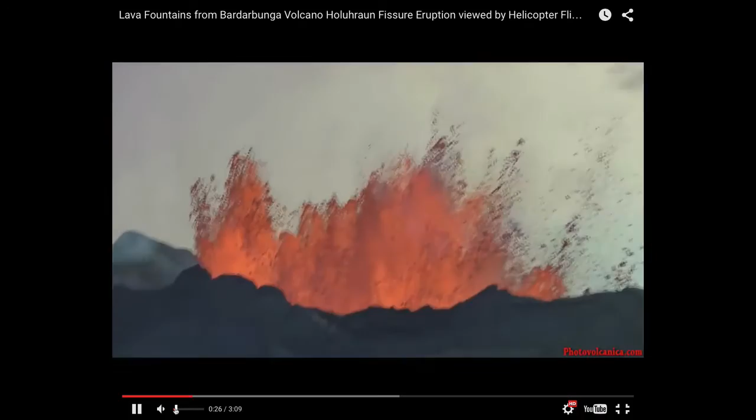Bardarbunga volcano. Sounds like a Silvio Berlusconi joke, doesn't it? Bunga Bunga. And this is a volcano that was erupting in the summer. It didn't turn out to be as devastating as the other one that's impossible to pronounce, the eruption that was erupting maybe underneath a glacier in 2011, I think, and shut down all of the airspace to Europe.

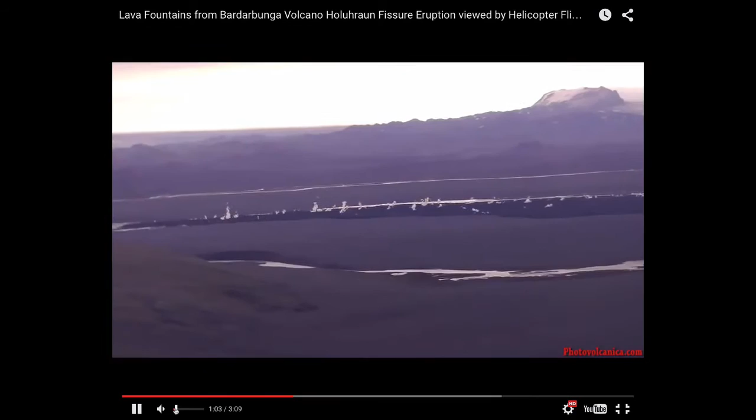Most of the routes from the east coast and the west coast of the U.S. to Western Europe take a great circle route, which goes quite close to Iceland. The shortest distance between 2 points on a sphere is a great circle, and that great circle passes pretty close to Iceland. And so this never turned into the huge ash discharge that was the problem with

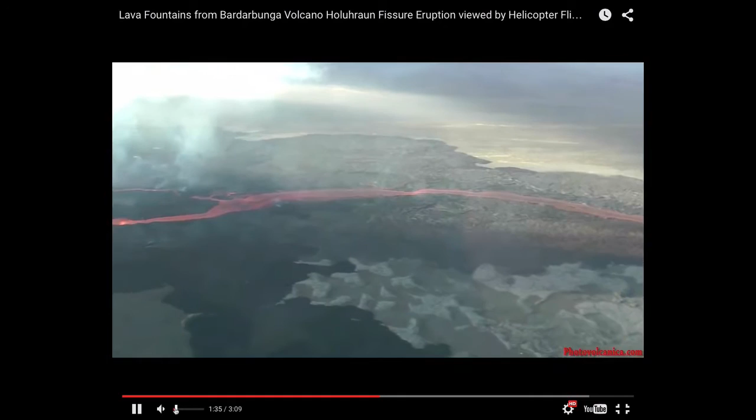Eyjafjallajökull, which I think over maybe 1 or 2 or 3 weeks shut down airspace between Europe and the US, primarily because you don't want to be flying into an ash cloud because it's not very good for the engines - it strips the engines. I think it doesn't do much more than that, but the question is how much ash is too much ash. And there certainly has been one.

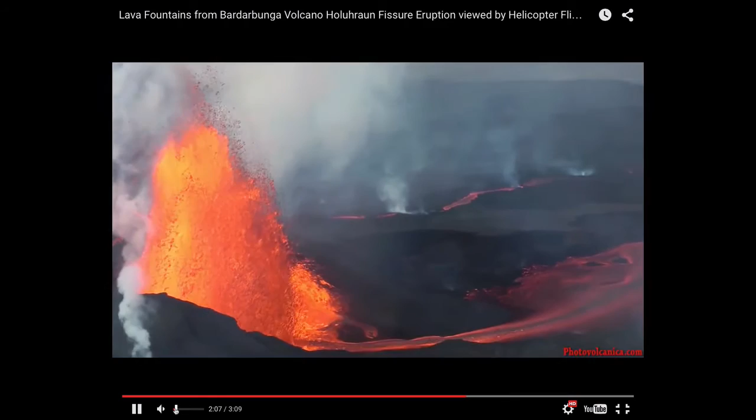There's a KLM 747 that was flying to Anchorage and went through a dust cloud, I think maybe from Redoubt, and all of a sudden the cockpit goes dark, all 4 engines flame out, and that's not really where you want to be in a plane, where you can only hear the wind around you. They ultimately did get them restarted and landed safely, but a hazard nonetheless.

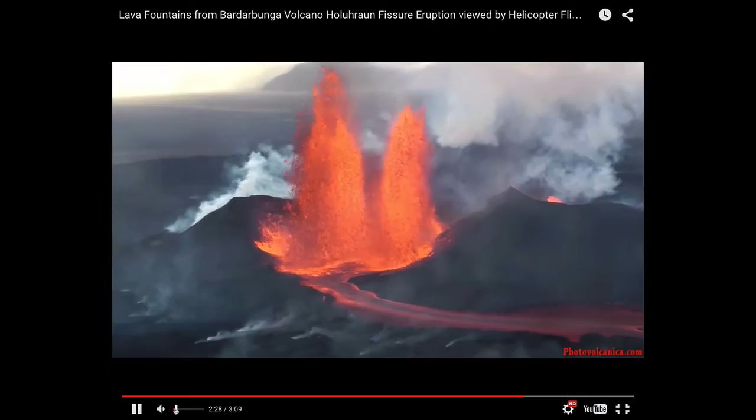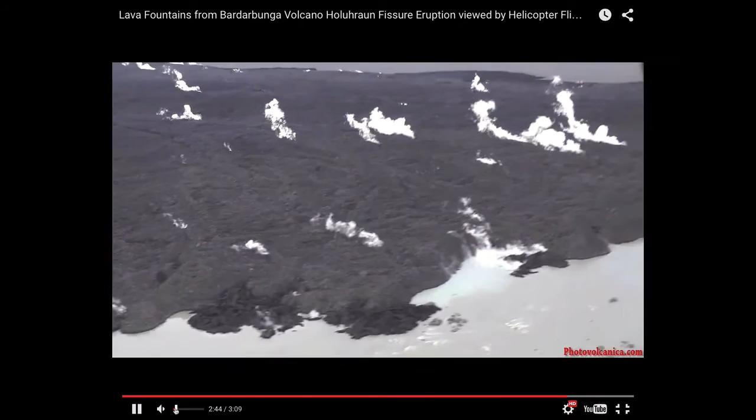Also, if you go to Asia, all the Pacific routes go down, you go over the pole. If you go to Beijing or Tokyo, you go over the pole and then come down across the Kamchatka Peninsula, which is volcanic. So the Ring of Fire, you basically travel the Ring of Fire by plane. One of the hazards is knowing when these volcanoes erupt, and as a result of that eruption, create this hazard for aviation.

So anyway, all by way of saying, when we're talking about fluid dynamics, we now have enough information to be able to do something about that. So we can look at the mechanisms by which eruptions occur. We can do a very simple calculation, and the simple calculation I was just going to do, just for the hell of it, was to...

So one question would be, where are we? We're 5. Still talking about fluid dynamics, still talking about Bernoulli.

So you have this system that looks something like this, where you have a volcano sitting on top of the crust. The crust may be something like 30 kilometers thick. So the question is, or one question could be, what velocity?

We can use Bernoulli simply to do that, so long as we constrain it. We do exactly what we've done in the past, and that is that we write Bernoulli at 2 points. We write out the 6 terms. We take this tack of always writing from upstream to downstream, as a matter of course. We don't need to do it yet, but we will do in the future.

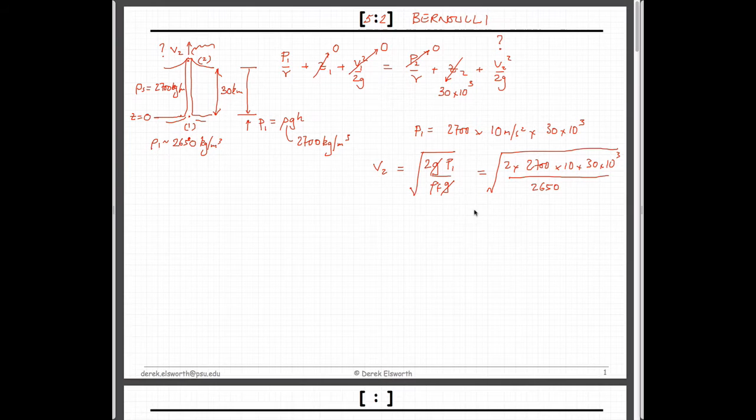And I suppose I could do that calculation. Did I do that calculation? I did that calculation if this is equal to 2600, and if that's the case, then V2 actually comes out to be 144 meters a second, which is preposterous, of course — about 300 miles an hour. And it's conditioned by the difference. So if you take this number as 2600, that's what you end up getting for V2, and that's much too fast. But it's conditioned by the magnitude you choose for this.

But the bottom line is that if you know or estimate the magnitudes of the pressure here, and if you know the density of the fluid that's driving it, given the mechanism that makes it work — the mechanism being that you have a weight from the supernatant crust sitting on top of this, and you have a fluid which is buoyant relative to that, rising up through it. Instead of calculating it as a buoyant force, Bernoulli accounts for that in some way because it's really balancing forces. It accounts for the fact that this magnitude is less than the column. In other words, you have a larger pressure here than the pressure here, and therefore this stuff gets forced out, squeezed out like toothpaste.

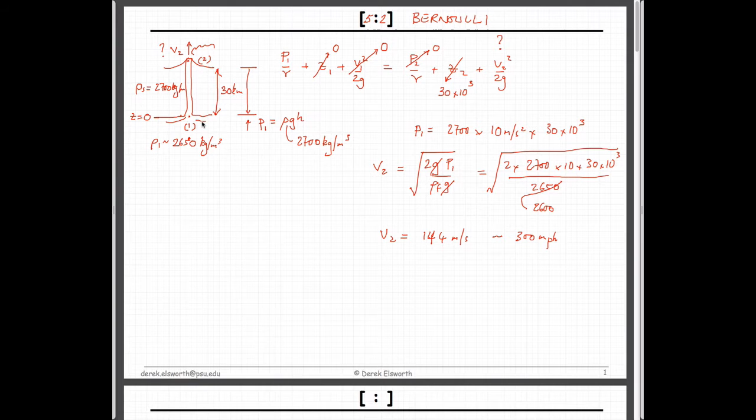And so if we wanted to do that, we could do it using Bernoulli. So anyway, that's just the basic calculation we're going to want to do in these calculations.

All right, so getting back to it — all I plan to do today is talk about some examples. We've done one already, an impromptu one. The examples rely mainly on our understanding of Bernoulli, which we've already used, so we don't care what these losses are yet, and we don't care what this pump head is yet, and therefore it doesn't matter whether we write it upstream and downstream, because we don't have to worry about these.

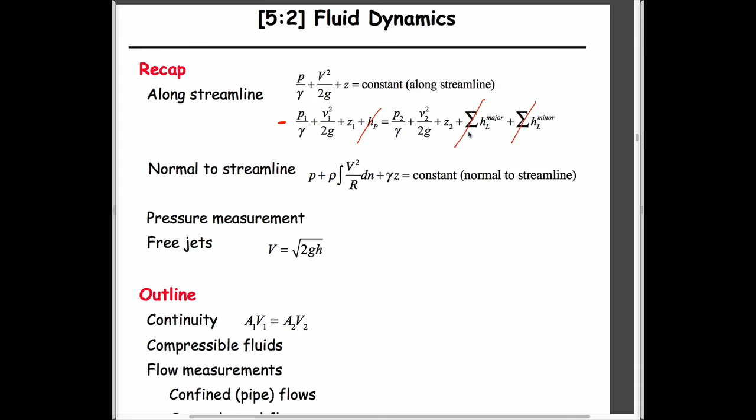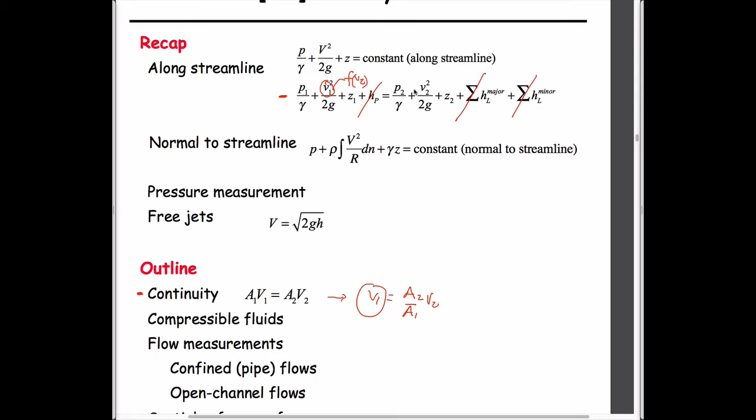We know that the equation of a free jet is just this — we did that last time. We'll do an example today to constrain it, but we said that if we know only 4 out of 5 of our constants in Bernoulli's equation, we have to constrain it in some way. One way is to write the upstream and downstream velocities as linked to each other, in which case we could write V1 equal to A2 over A1 times V2, expressing V1 as a function of V2. So now, instead of having 6 unknowns, we only have 5, because we've defined it in terms of V2.

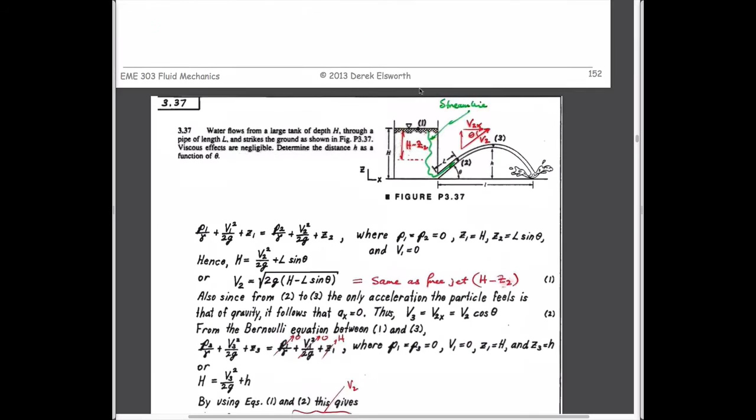So let's just do some examples related to that. They're all contrived examples, but they're interesting in their own right, I guess. I'll talk not in terms of doing the calculations per se, but in terms of the philosophy of how we might want to approach these.

So this is a big tank that has a hose coming out of the bottom of it. I suppose you could ask what angle you have to apply to that hose to get it to either go the highest or the furthest. Highest, I guess, would be the value of h, which I think is really what you're being asked here. But you could also ask how far — the angle you'd have to put it at so it goes the furthest. So as a thought exercise, we could do the two simplest arrangements of that.

One simple arrangement would be to have this hose come out of here and go up to here. If we did that, with point 1 here and point 2 here, we know we can write Bernoulli's equation between those. I always write it in this form just because it's easiest for my simple mind.

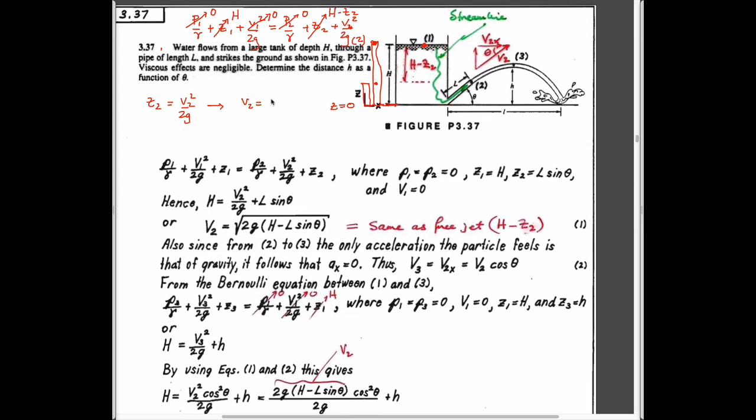So in other words, when you rearrange this expression, you'd end up with this. And of course this is the same as V2 equals this, which we have seen before.

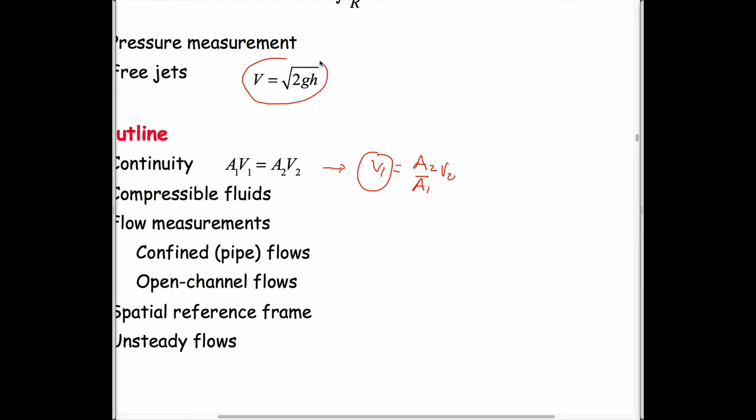And so it actually works as a free jet, what we've called a free jet. Remember the free jet we talked about before was the hole in the bottom of a bucket, going downwards. It actually doesn't matter if the hole was in the side of the bucket and squirting out horizontally, it'd be exactly the same expression, as you have here going upwards, the opposite. So this is a relatively important and interesting standard result that we'll use.

So those are the two kind of end member conditions shown here. If you have your tube that goes up here, it would only flow, and the velocity at this point you could imagine would be equal to 0. The maximum height it would go up would be equal to the height of the water in here - kind of makes sense. If you truncate the tube below that, then the magnitude of the velocity coming out here, this would be v2, is going to be equal to the head of water above it, h minus z2 in this particular case.

Okay, so that's the big picture. What you're being asked here is to calculate what is the maximum height that this would go to. Clearly if you arrange this tube so it's horizontal, then the maximum height it would go up to would be 0, because you'd be shooting horizontally. It would come out at some velocity. What's the velocity it would come out at?

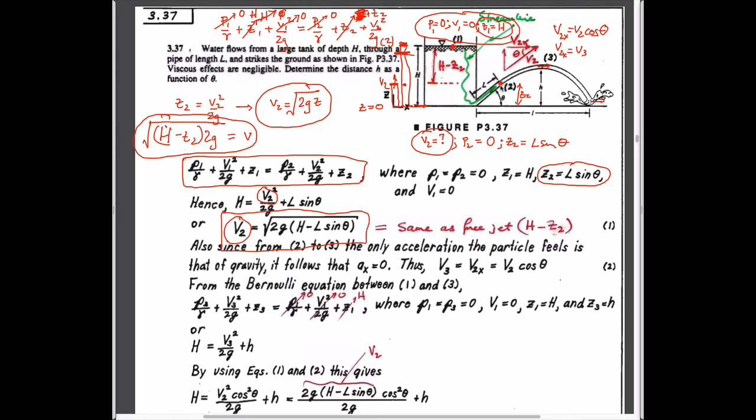And so we know that this is going to be equal to V3, right? By definition. And so now, if we write Bernoulli's equation between point 2 and point 3, which is this expression here, then we figure out exactly what we know. We don't know V3, but we know that that is equal to V2. We know it's equal to this, right? We know that V3 is equal to V2 cosine theta, and we know what V2 is.

So in some respects, we know what this is. We know the pressure at 3. Pressure at 3 has to be 0, right? By definition. We know the elevation of 3. Well, that's actually what we want to find out, right? This is h. So we have this term which we don't know.

We know the pressure, I guess actually, this is written between point 3 and point, we could do it with point 2 as well, I guess. But if you write it between 3 and 1, the pressure on the top of the tank is 0, the velocity, the big tank assumption is 0, and the elevation of that top surface is equal to H. And so the only thing that we don't know here is h. We know what V3 is as a function of all of these other terms, which we know. We know the height, we know the length, etc. And we can solve for the magnitude.

Not so easy to solve for, but basically that's the complicated expression. Doesn't matter what the complicated expression is. The only trick, I guess, to doing this is to realize that fluid coming out of here.

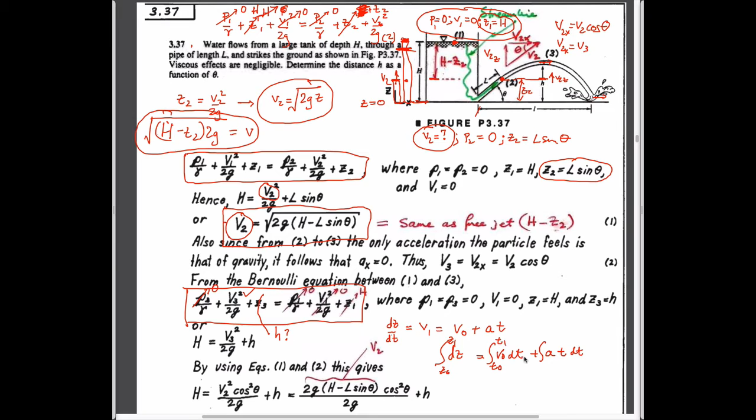And so you could write this out as dz is equal to v0 dt plus acceleration times time dt. Got a cramp here. And this just becomes, this is z0, z1. This is t0, t1, t0, t1. And you certainly know this expression, right?

So this ends up being z1 minus z0. The distance traveled is equal to v0 times t1 minus t0, the time taken, plus a half a t0, t1 squared minus t0 squared. This is backwards, right? This should be t1 minus t0.

You've seen this. This is your normal dynamics equation. It just says the distance traveled is equal to v0 times time, since 0, plus a half at squared.

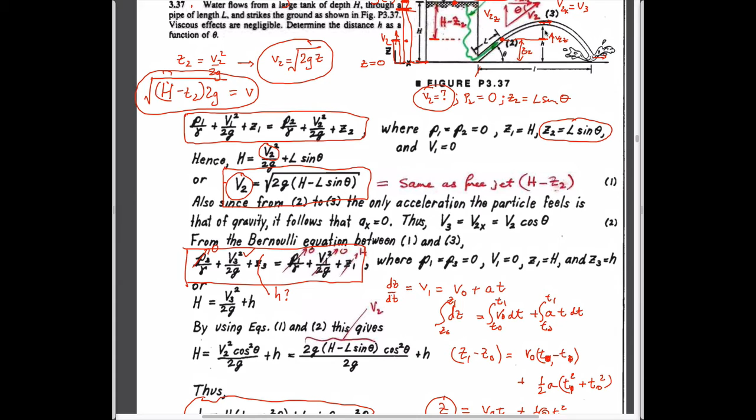The realization is that the jet coming out of it comes out at some streamlined velocity, v2. You can think of that either as a horizontal velocity, which will always keep the same magnitude because there's nothing acting on it, and calculate exactly when the streamlined velocity at the top of the arc equals that same magnitude. Or you can take it as coming out with some vertical velocity, which is the velocity it comes out of my hand, and calculate the height of the arc before the velocity at the top becomes 0 - that height is that same amount. So it's just a matter of dissecting these expressions to do that.

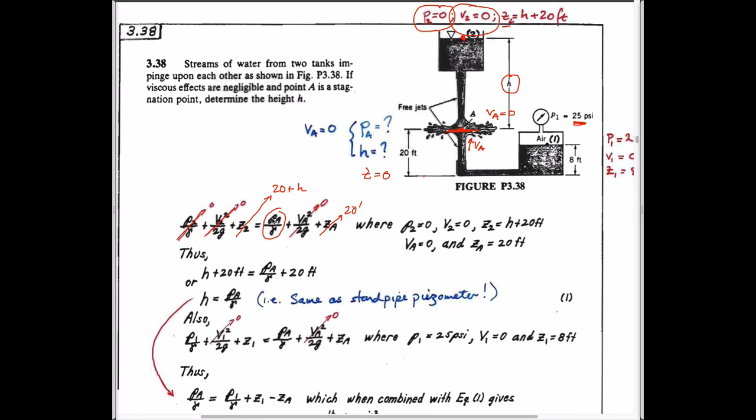So the net result of this is we have this expression here - that's just what comes out of this. And since we get rid of the 20 on both sides, it's just equal to this. And actually this is interesting because head is equal to pressure A over unit weight. Basically it's saying this is no different than if you had a column of water sitting in a bucket and looking at the pressure here - this expression here, right?

The same as the pressure in a static fluid. It's interesting that the height of this column, because it's free falling, is just the same. Destroying that velocity is the same as just the column of water above it. It kind of makes sense.

So what about, we have a pressure, and we know that pressure here, but we don't know what H is. Can we now calculate what that pressure is as a function, writing Bernoulli between point 1 and point A? So we can do that here.

What about point 1? We know the pressure at point 1 is equal to, well, we don't work in these mongrel units, but let's pretend we are for a moment, PSI. Again, big tank assumption. And elevation is equal to 8 feet.

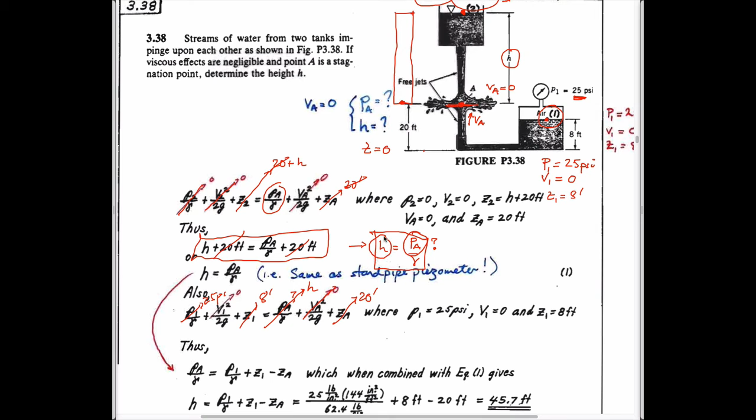So is there anything there that we need? I guess we have magnitudes for all of these terms, and since this is now this pressure here, the only term in this equation we don't know is a value of H. And we can solve for a value of H, which turns out to be 45.7 feet.

So that's it. All we're doing is writing things in terms of the pressure here. The pressure here turns out to be just the pressure due to the column of water. Just turns out that way. We haven't made that assumption, but it turns out that way from Bernoulli.

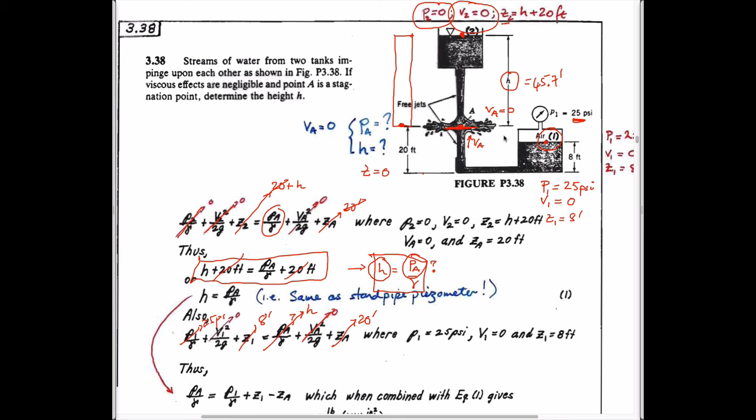So we know that the pressure at this point, the stagnation pressure, has to be equal to H. So if we can now write it in terms of this expression here, because this system is completely defined, this really has everything defined to calculate pressure at A, we're able to calculate the height.

Yeah, all right, okay. We've used this, actually we haven't used this already. We haven't needed to use it, but we've made the point that we can use it.

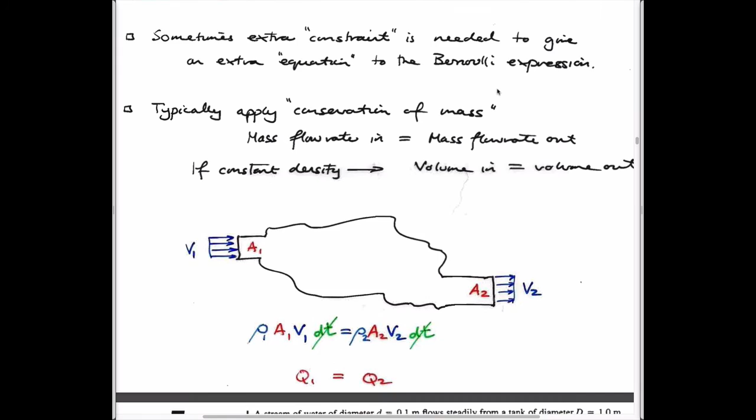So we've said that if we only know 4 of the components of Bernoulli, then we can arrange it so that we take 2 streamlines, where this is a top streamline given here, and a bottom streamline given here. By definition, the fluid velocities across those streamlines have to be 0, because that's the definition of a streamline.

And so everything that comes in on the left-hand side here has to go out of the right-hand side, because it's steady state. The amount that comes in here has to displace the same amount that goes out here.

So we can write just an expression for the flow rate, actually a mass flow rate in this particular case. Mass flow rate at location 1 has to equal the mass flow rate at location 2. Area times velocity is just Q. Amount multiplied by time is a volume. A volume times a density is a mass. And so this is mass in equals mass out.

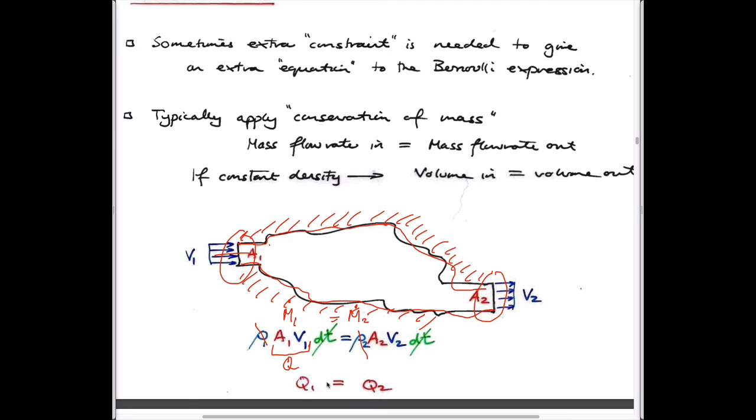Usually the density coming in is taken as the same as the density going out, in which case these flow rates in and flow rates out are just taken as being the same. And the reason for doing that is that in some cases we might want to not assume the so-called big tank assumption.

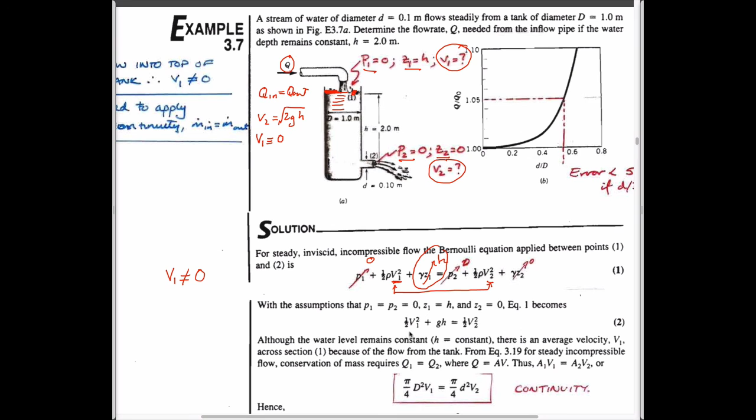So what we're interested in doing now is constraining this, because when we manipulate Bernoulli, we have two velocities and we'd like to get rid of one of them. So we can write A1 V1 is equal to A2 V2.

So this velocity here, we know the diameter of this, so A1 is equal to pi d1 squared over 4, which is equal to pi lowercase d squared over 4, V2. Get rid of the pi's, get rid of the 4's, and so we have V1 equal to the pipe diameter squared, the top of the tank diameter squared, times V2. This is just a constant, right?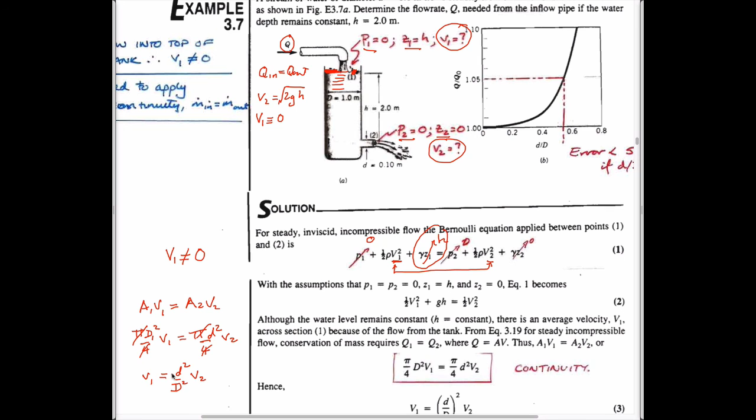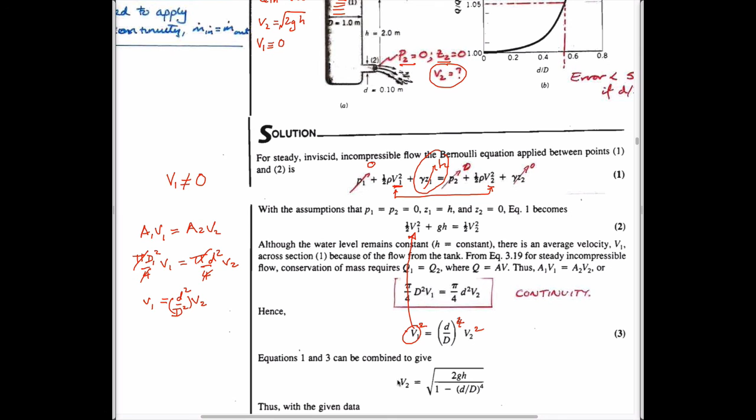And so what we could do is substitute this term into here. Well, we could square it, and substitute in here. Now this whole term is written in terms of the velocity coming out of the pipe and a geometric factor. All it does is give us now a velocity which is modulated slightly to account for that. And so with this, this is now the new velocity. It's affected by the size of the tank.

I suppose if the tank diameter D goes to infinity, in other words if the tank is really very big, D has to be very big, then this term goes to 0, and this truly is equal to the square root of 2gh. But if the tank is not infinity, but much smaller — in the limit I can't really get there, but if the diameter of the tank was equal to the diameter of the pipe, then this expression would actually blow up.

But if the tank was not much, say 10 times larger than the pipe, then this would be a tenth, this would be 10 to the minus 4, then actually it would be an insignificant term.

So you can calculate the flow rate that comes out of here as a function of this being an infinitely large tank, and you can also calculate the magnitude of the flow rate if it's a tank that's not infinitely large — that's what this expression is here. It's saying that if the tank diameter is really, really big, this expression is basically 0, and the amount of fluid coming out of the tank is basically the amount calculated from 2gh. So the flow rate coming out of the tank Q0 is just equal to pi d squared upon 4 times V2 — this is just the area times V2. And we can calculate that, and that would be exactly the right answer.

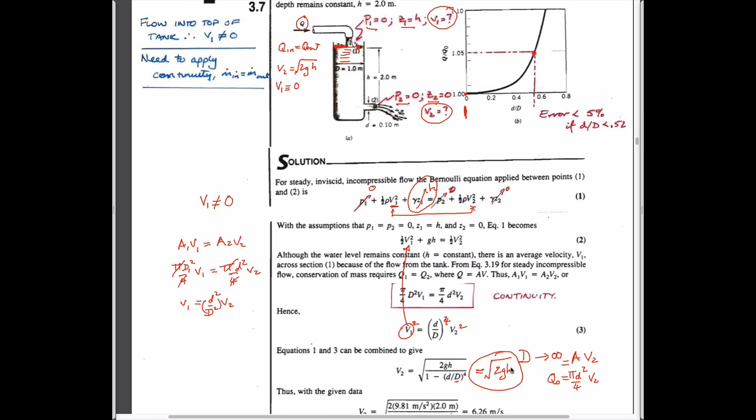Okay, I won't do this last one because we'll do that soon enough and we're close to the end. We'll talk about it when we discuss balancing forces. Bernoulli's equation just allows us to balance forces, F equals ma. We'll do the example of taking a gas cylinder in a lab and decapitating it and seeing how fast that gas cylinder travels, and we'll do something very similar when we do that.